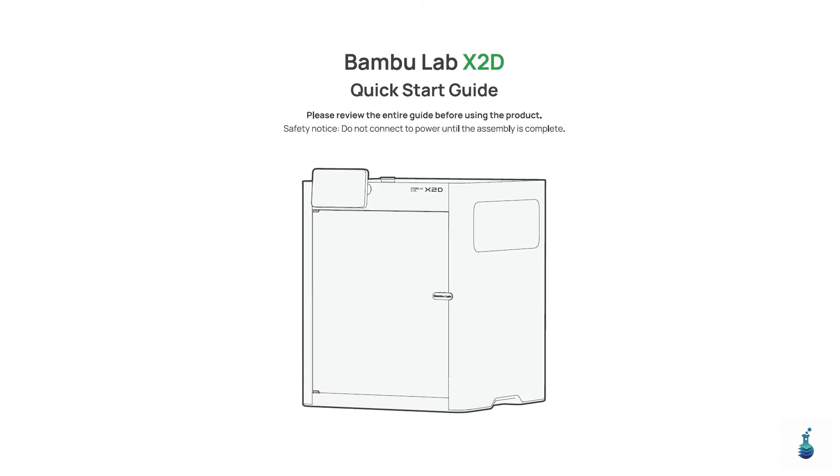Welcome to the Bambu Lab X2D Quick Start Guide.

Before we begin, a quick safety reminder: do not connect this printer to power until assembly is fully complete. Let's walk through every step together.

Before diving in, here are 4 resources you'll want to know about. Download Bambu Handy for your phone and Bambu Studio for your computer. These let you control the printer remotely and monitor prints in real time. If you're looking for models to print, head over to MakerWorld at makerworld.com. And to level up your skills, check out Bambu Academy at bambulab.com/support/academy. Here's what we'll cover in this guide.

We start with safety notes, then walk through a full component overview of the printer and toolhead. After that, we'll unbox everything, unlock the heat bed, remove the lead screw protectors, and unlock the toolhead. Then we'll install the touchscreen, auxiliary extruder, and spool holder. We'll also cover how to use an external spool and install the exhaust fan. Continuing on, we'll plug in the power, bind the printer using both Bambu Handy and Bambu Studio, and then run your very first print. The guide wraps up with after-print care tips, regular maintenance advice, full printer specifications, and how to reach technical support if you need it.

A few important things to know before you start. Always check that the printer's operating voltage matches your region—look at the label next to the power socket. Regular maintenance is key to keeping things running smoothly. For the best results, use Bambu-branded filaments since they've been tested specifically for this printer.

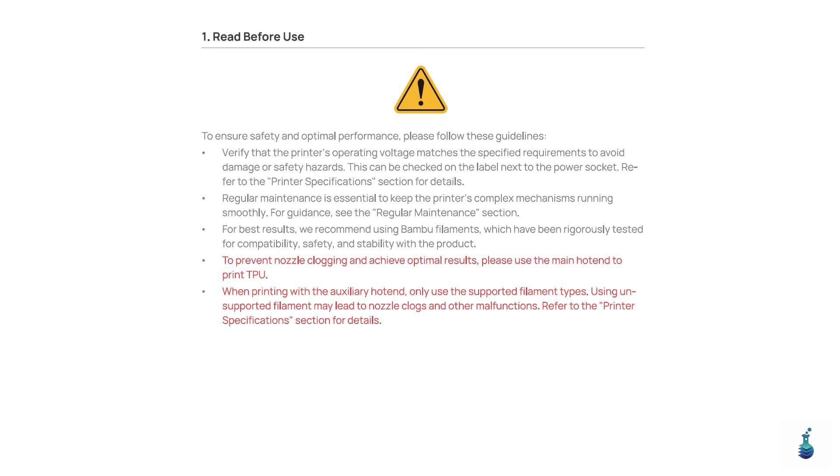2 critical warnings: always use the main hot end for TPU to avoid clogs, and when using the auxiliary hot end, only use the filament types listed in the specifications. Unsupported materials can cause serious malfunctions.

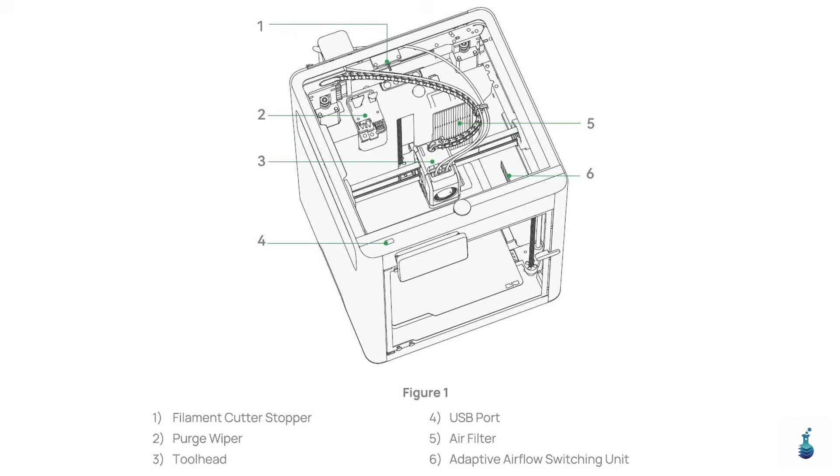Let's look inside the printer from the top. The key internal components are the filament cutter stopper, the purge wiper which cleans the nozzle between color changes, the tool head which is the heart of the printing system, a USB port for file transfers, an air filter, and the adaptive airflow switching unit which manages airflow automatically based on what you're printing.

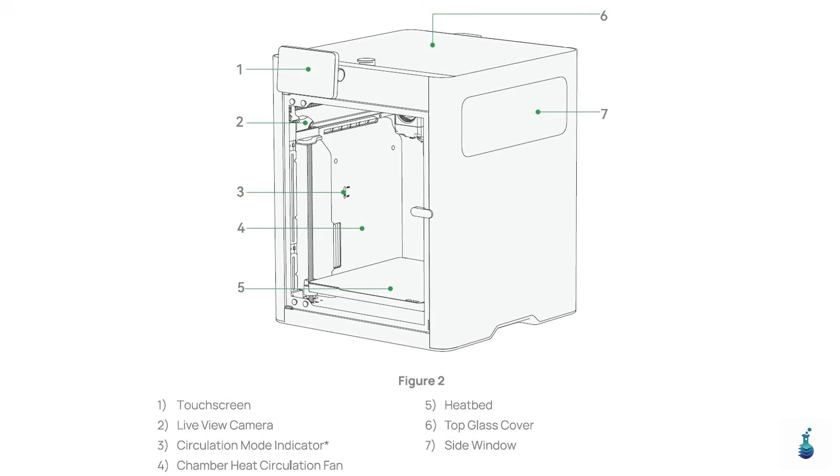Now looking at the front of the printer, you'll see the touch screen for direct control, a live view camera so you can watch your prints remotely, and a circulation mode indicator. This switches automatically—no manual input needed. There's also a chamber heat circulation fan and the heat bed at the bottom. On top sits the top glass cover, and on the side you'll find the side window for watching your print progress.

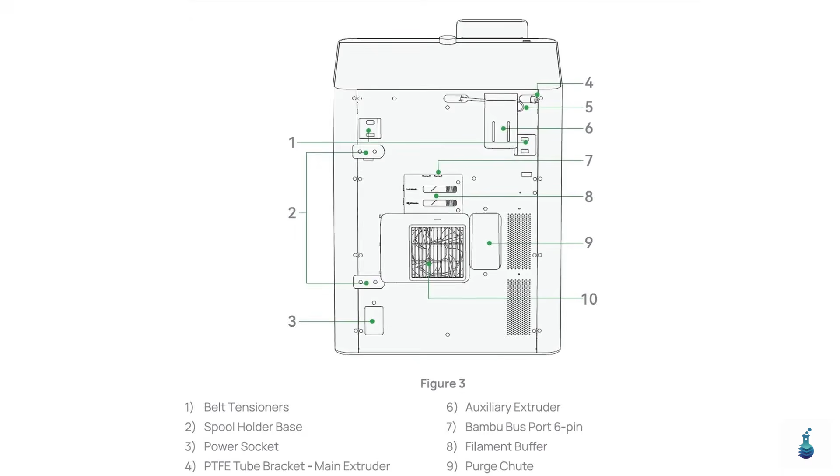On the back of the printer you'll find belt tensioners for calibrating motion accuracy, the spool holder base, the power socket, and PTFE tube brackets for both the main extruder and auxiliary extruder. There's also the auxiliary extruder module, a Bambu Bus Port 6-pin for connecting accessories, a filament buffer, a purge chute, and the external exhaust fan.

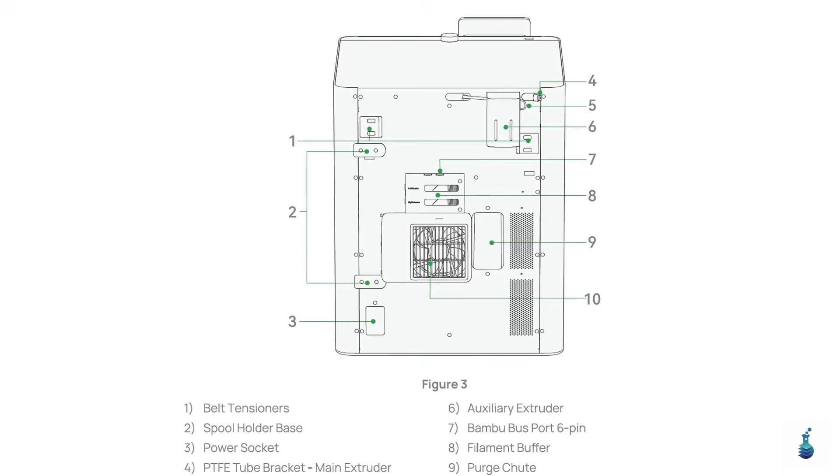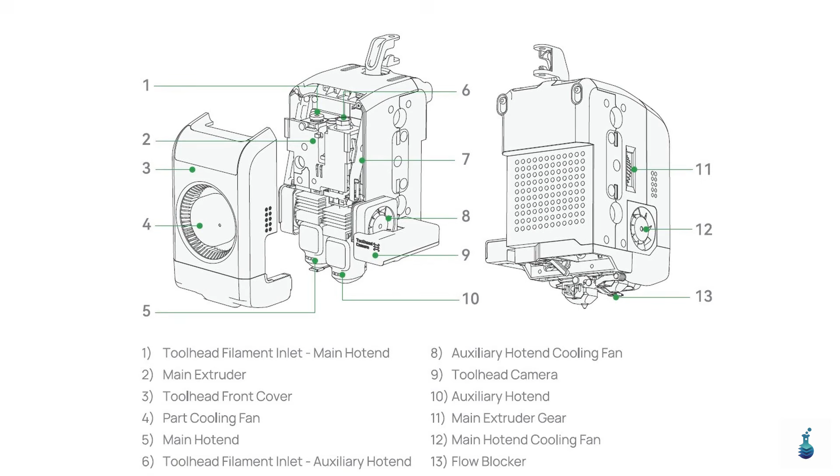On the other side, the filament inlet for the auxiliary hot end, a filament cutter lever, the auxiliary hot end cooling fan, the tool head camera, and the auxiliary hot end. On the back, the main extruder gear, the main hot end cooling fan, and the flow blocker.

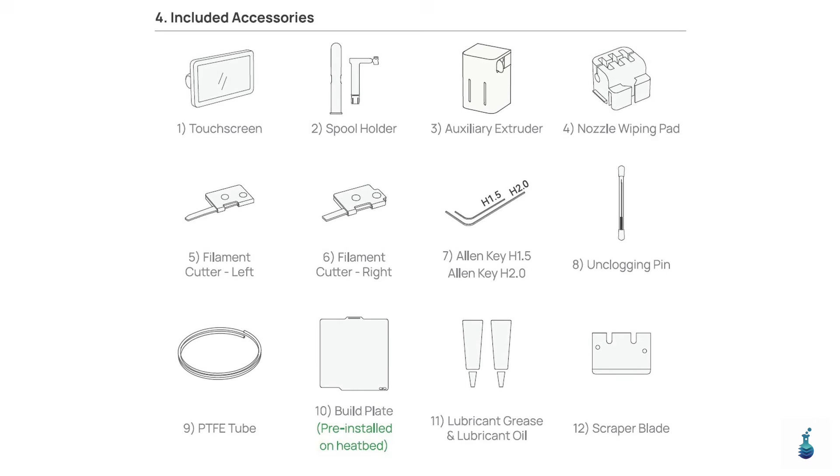Your box includes everything you need to get set up. You'll find the touchscreen, spool holder, auxiliary extruder, a nozzle wiping pad, filament cutter left and right, an Allen key H1.5 and H2, an unclogging pin, a PTFE tube, a build plate already pre-installed on the heat bed, lubricant grease and oil, and a scraper blade.

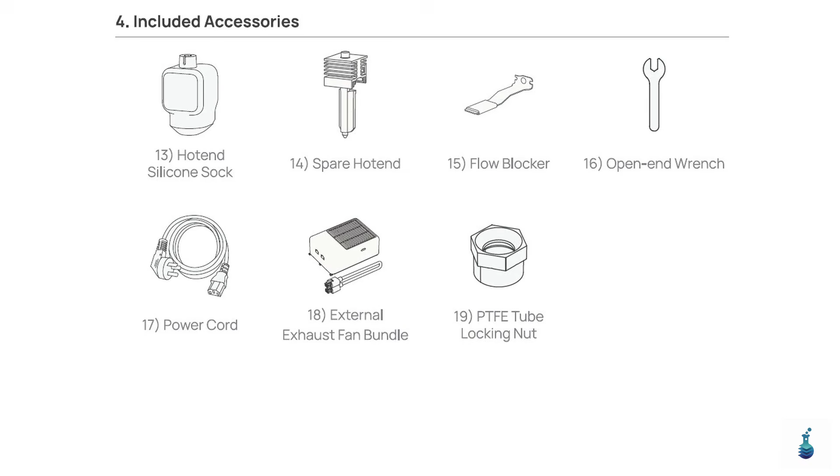Continuing with the accessories: a hot end silicone sock, a spare hot end, a flow blocker, an open end wrench, a power cord, the external exhaust fan bundle, and a PTFE tube locking nut. Make sure all of these are present before you begin assembly.

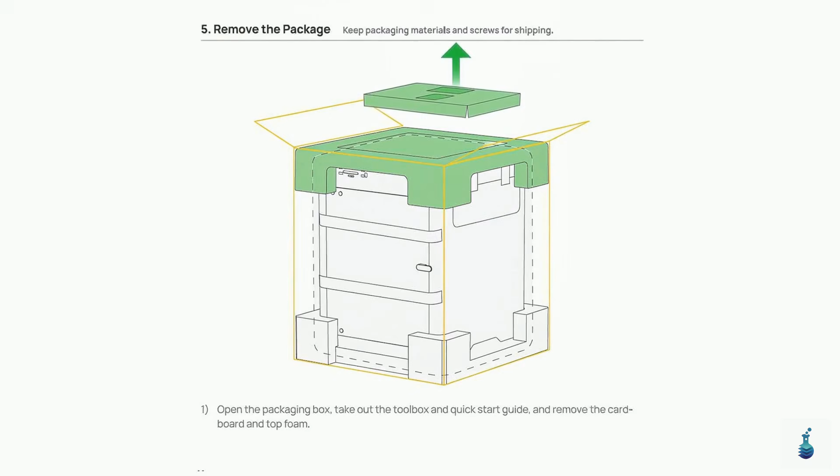Time to unbox. Open the shipping box and take out the toolbox and quick start guide sitting on top. Then remove the cardboard layer and lift off the top foam padding. Pro tip: save all the packaging materials and screws—you'll need them if you ever ship the printer again.

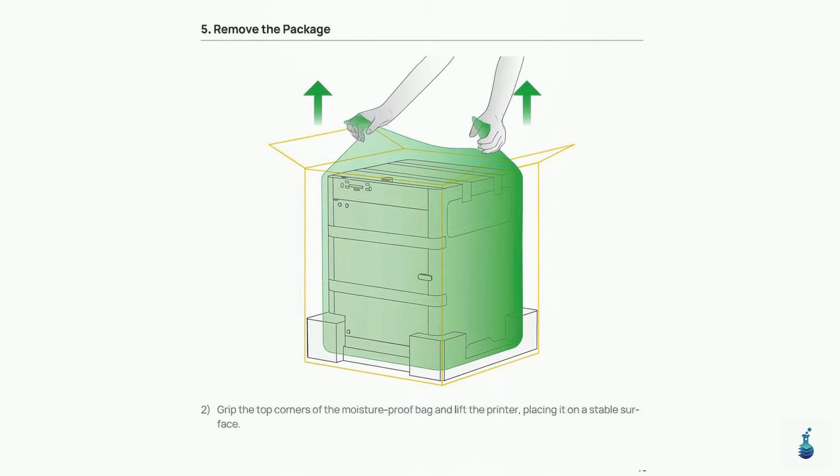Next, grip the top corners of the green moisture-proof bag and use it to lift the printer out of the box. Place it gently onto a stable, flat surface. Keep the bag handy—we'll remove it in the next step. Important safety note: keep this moisture-proof bag away from babies and children due to suffocation hazard. Go ahead and remove the bag, then take out the PTFE tubes stored inside it.

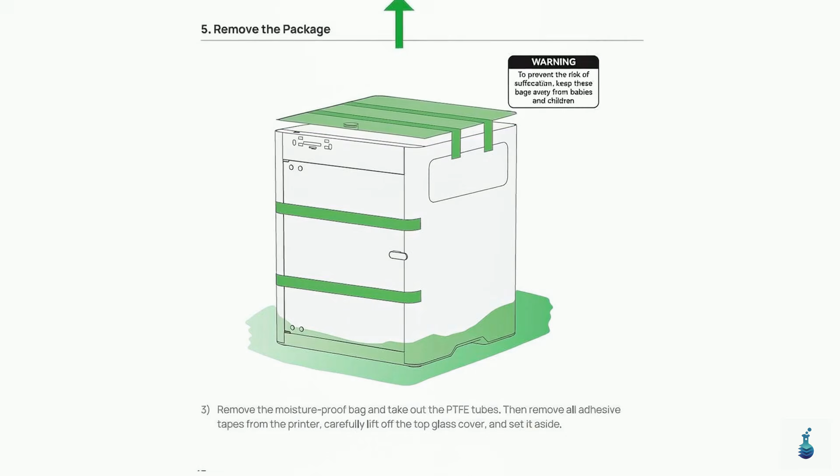Peel off all the adhesive tape from around the printer body. Carefully lift off the top glass cover and set it aside safely. Now open up the top of the printer and take out all the accessories packed inside. Once everything is out, remove the surrounding cardboard panels from the sides. Your printer should now be fully unboxed and ready for assembly.

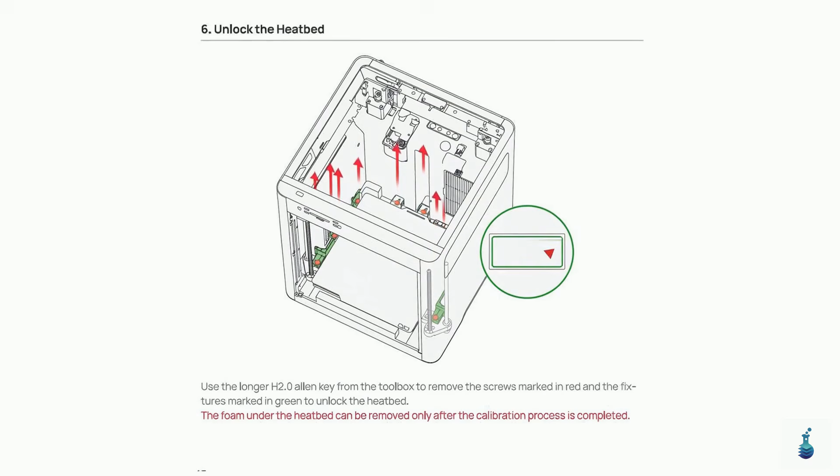Grab the longer H2 Allen key from your toolbox. Use it to remove the red-marked screws and pull out the green-marked plastic fixtures that are holding the heat bed in place during shipping. One important note: do not remove the foam underneath the heat bed yet.

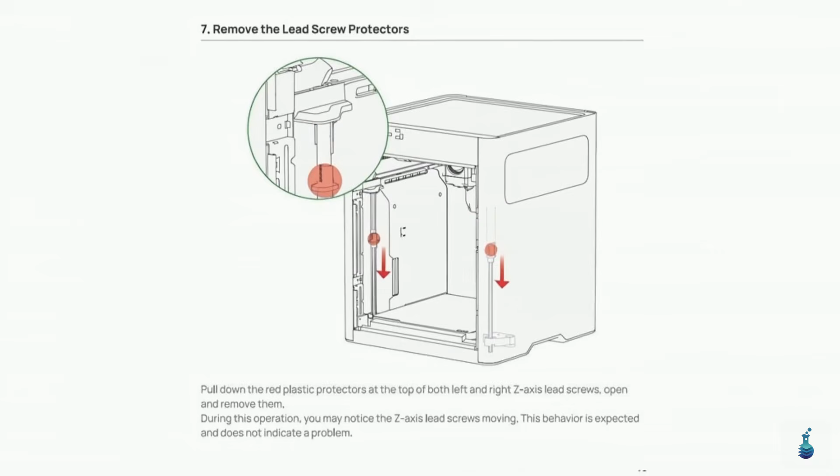Locate the red plastic protectors at the top of both the left and right Z-axis lead screws. Pull them downward, open them up, and remove them. You may notice the lead screws shifting slightly as you do this. That's completely normal and nothing to worry about.

Installing the touchscreen is a two-part process. First, remove the tape holding the flexible ribbon cable in place, then gently pull the cable out about 50 millimeters. Second, take your touchscreen and orient it so the port lines up correctly. Press the terminals on both sides of the ribbon cable and insert it into the screen's port until it clicks in. Now push the flexible cable back into the slot in the printer body.

Then take the screen, insert it into the bracket, and slide it to the left until it locks into place with a satisfying click. The touchscreen is now installed.

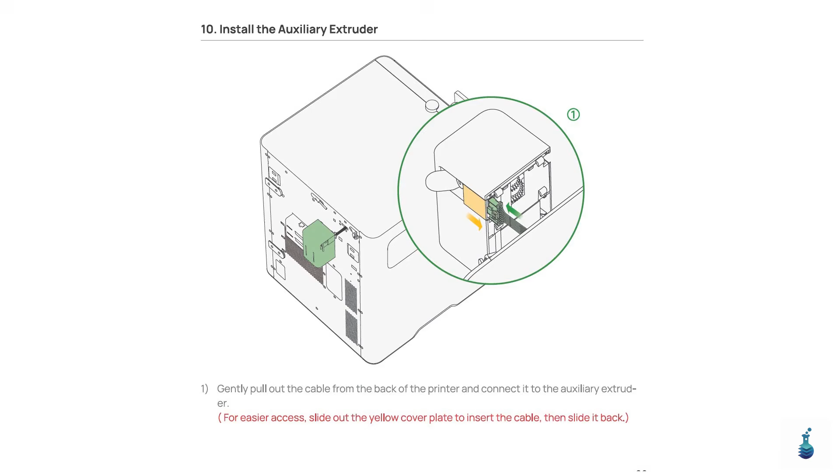On the back of the printer, gently pull the cable out from its slot and plug it into the connector on the auxiliary extruder. To make this easier, slide out the yellow cover plate on the extruder to give you better access when inserting the cable, then slide it back in place once connected.

Next, loosen the nut on the left connector of the auxiliary extruder. Then take the PTFE tube from the top center of the rear panel and insert it about 22 millimeters into the connector. This is important. Make sure the tube is fully seated. If it's not fully inserted, filament can curl inside the extruder and cause feeding problems.

Now push the cable back into its slot, insert the auxiliary extruder into its bracket, and press down firmly to lock it. Once locked, use the open-end wrench to tighten the left nut until you hear a clicking sound. That confirms it's secure.

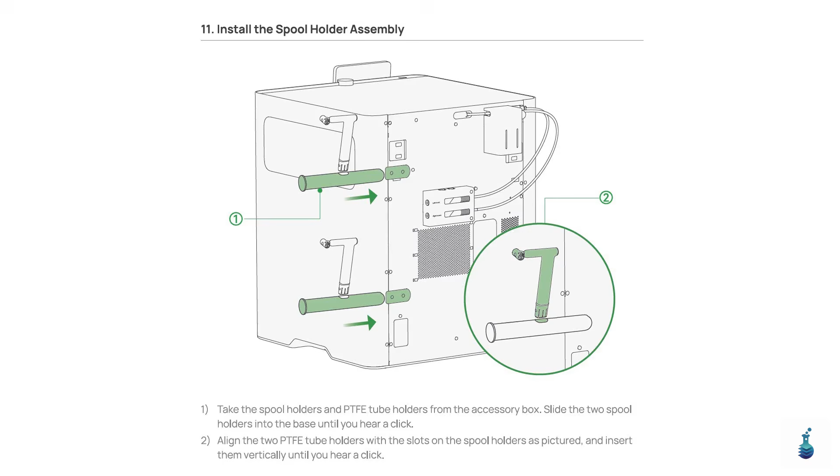Next, remove the tape from the PTFE tubes on the right side of the filament buffer. Connect the gray tube to the PTFE bracket on the printer and the white tube to the right side of the auxiliary extruder. Take the 2 spool holders and PTFE tube holders from the accessory box.

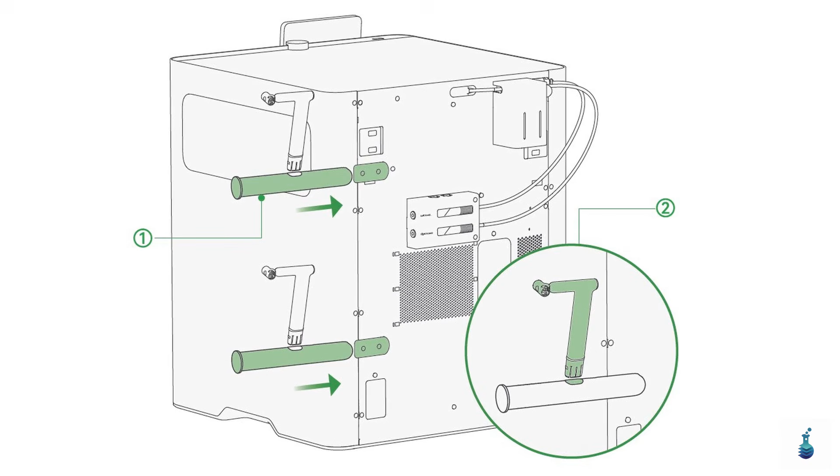Slide each spool holder into the base on the back of the printer until you hear a click. That's the latch engaging. Then, take the 2 PTFE tube holders, align them with the slots on the spool holders as shown in the diagram, and insert them vertically until they click into place.

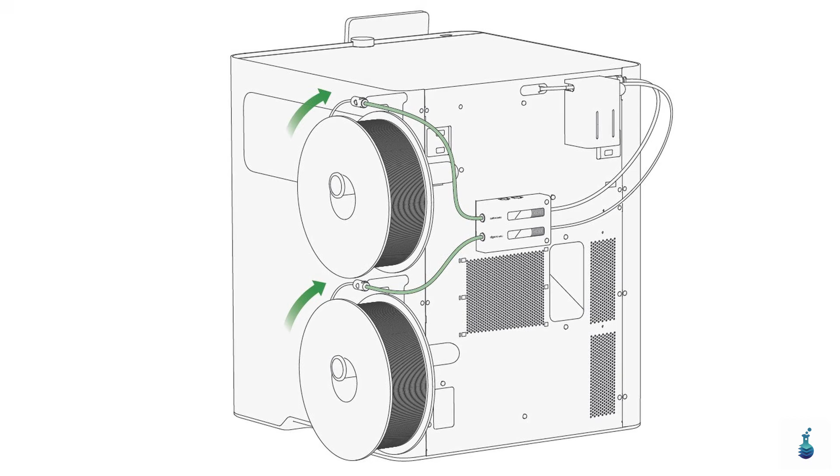To load external filament spools, first remove the tape from the PTFE tubes on the left side of the filament buffer. Connect the gray PTFE tube to the upper spool holder, and the white PTFE tube to the lower spool holder. Then load your filament into each PTFE tube, feeding it in until it reaches the extruder and stops.

Take the external exhaust fan, insert it into the slot on the back of the printer, and slide it to the left to lock it in. Then, take the Bambu Bus cable and plug each end into the 6-pin ports. One end goes into the filament buffer, the other into the exhaust fan. This connects everything to the printer's control system.

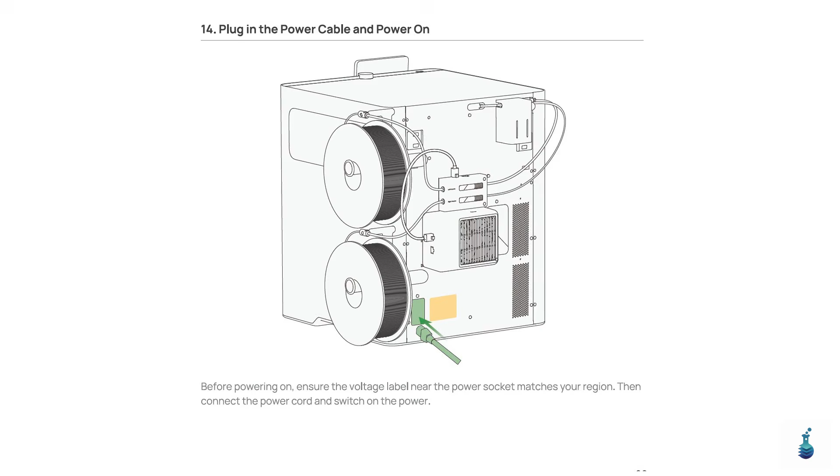Before plugging anything in, check the voltage label near the power socket and confirm it matches the power in your home or workspace. Once confirmed, connect the power cord and flip the power switch on.

Assembly is now complete. To bind via phone, download Bambu Handy by scanning the QR code. Then create or log into your Bambu Lab account. Follow the on-screen prompts on the printer until a QR code appears. Scan that QR code in Bambu Handy to link the printer to your account.

Follow the instructions to complete initial calibration. Expect some vibration and noise, that's normal. Do not remove the foam under the heat bed until calibration finishes.

To bind via computer, make sure your computer and printer are on the same Wi-Fi network. Don't use a guest network with device isolation enabled.

Download and install Bambu Studio from bambulab.com/download/studio, then log in to your Bambu Lab account. In the Device tab, click the plus button, and Bambu Studio will automatically find your printer on the network. Click it to bind. You're ready to print.

On the touchscreen, go to Print Files and select any model from the built-in library. Great starting options include the 3D Benchy or Squishy Turtle.

One tip: the textured PEI build plate is sensitive to oils from your hands. If you've touched it, give it a quick wash with hot water and dish soap before printing to ensure the best first layer adhesion. Once your print is done, wait for the build plate to fully cool before removing the print. Pulling it off while hot can damage the surface.

Regularly wash the build plate with hot water and detergent to maintain adhesion over time. If your model used support structures, remove them as soon as possible after the print. Filament can absorb moisture and make supports much harder to remove later.